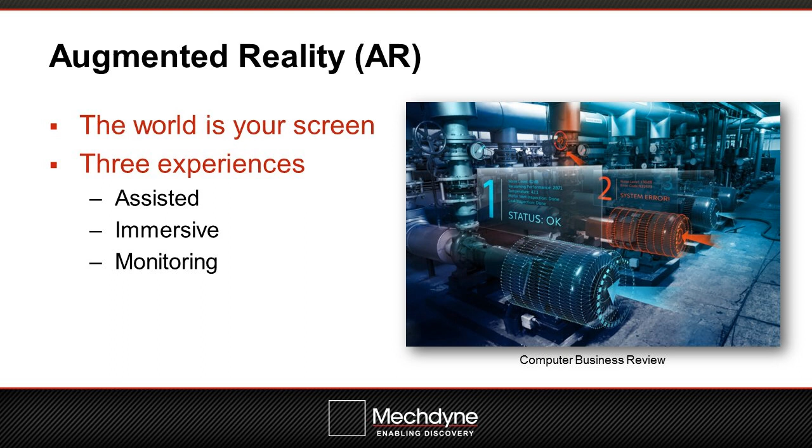Achieving that level of feeling like you're present comes from many factors. The display fidelity - the resolution of the displays, the number of screens you have, how photorealistic things are - are factors in making you believe the model is real. The interaction fidelity is how easily you can interact with that model like you would in the real world. Can you move around it easily? Can you pull things apart? Everything you do in the real world you want to be able to do in the virtual world. There can be other cues like audio cues or even smell cues, who knows what you're doing, but all these things can suspend disbelief and make you feel like you are present with that virtual object. So you're really trying to create a sensory experience to create a virtual world.

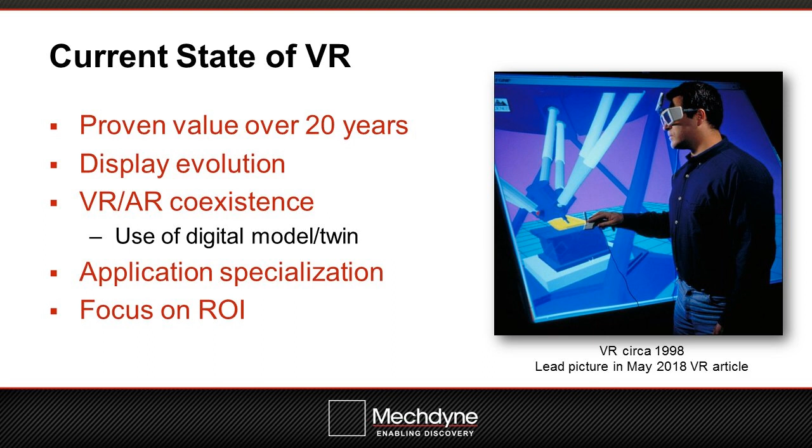There's always been a focus on, but I think it's been increasing especially in the last 5 years, the focus on return on investment. This is an investment, and we're being asked more and more how we can justify investment in these technologies, how it's going to save money or do other things. That's extremely important and increasing in importance, because quite often these technologies are competing with other initiatives in an organization.

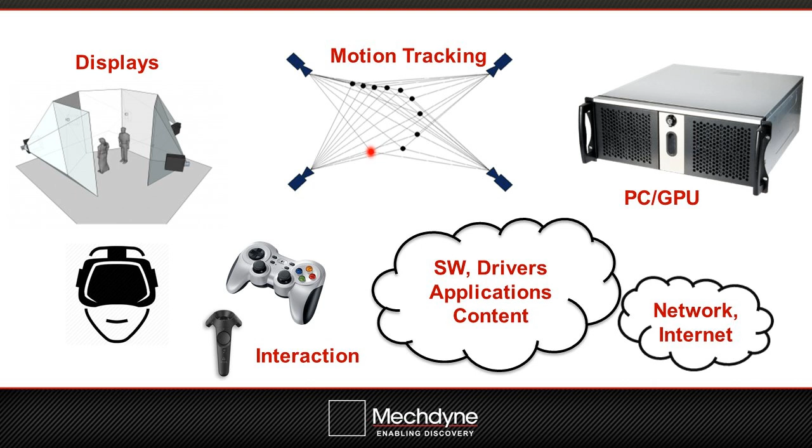The first part of this, I don't want to spend a lot of time here because each one of these could be a topic, and the types of displays are specific to different applications. But we were asked for a summary of the different display types available that go over and above head-mounted displays, so we'll spend some time on this.

But first, I should spend a little bit of time on head-mounted displays, because I think they are an important factor out there. They've been around for decades, but they're starting to meet expectations because of the increasing fidelity, just the way that people can view their data.

It's a low-cost device. It's a great way to start trying things and to test things. You can deploy them at the desktop level, it doesn't require its own space. Resolution's improving. They started out as single user, but there are now many multi-user applications where people can share in the virtual environment or share a virtual model, whether local or remote, and these devices continue to improve.

But there are some considerations that can sometimes cause people to start with an HMD and then start to wonder what other displays are available. That might be a factor of use time. People that have them often say they can wear them for maybe 15 or 20 minutes, and then it just becomes too fatiguing, for various reasons.

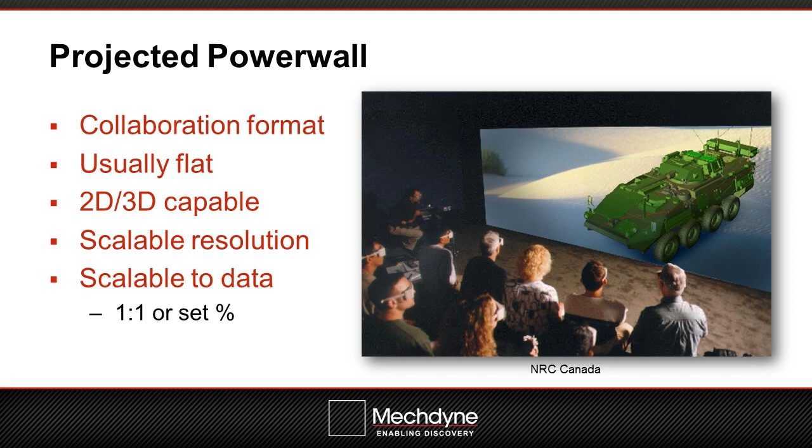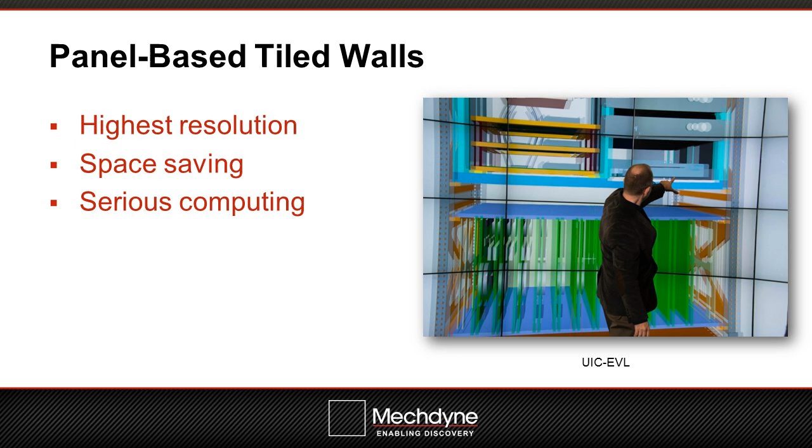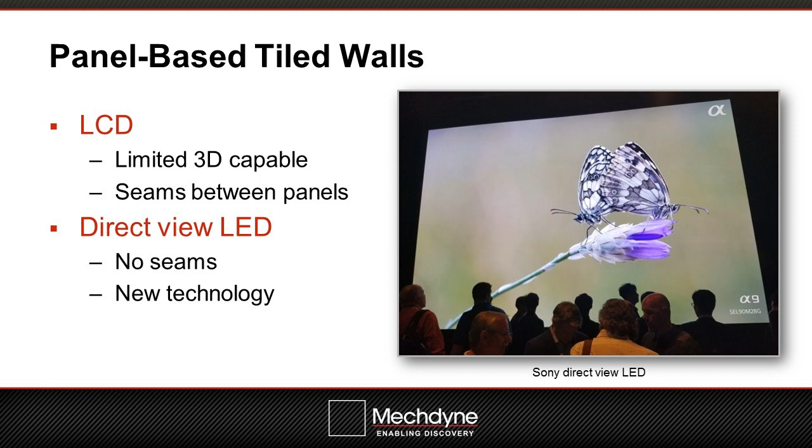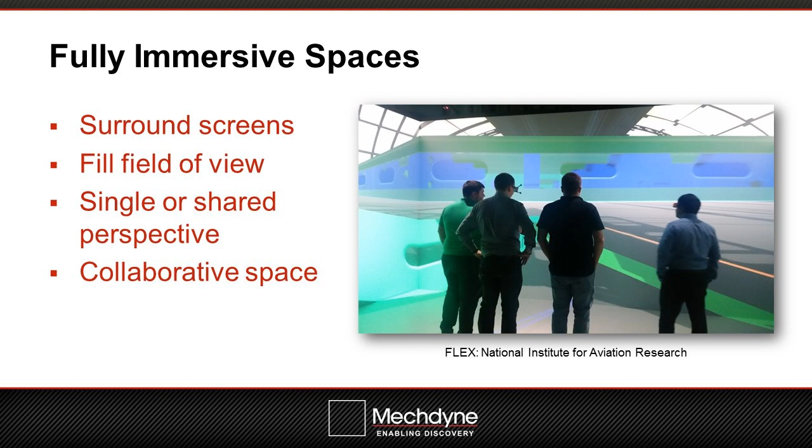Fully immersive spaces are just that - we're building an environment with surround screens. It could be a floor and a wall, or a floor and two walls, all the way up to six walls. The idea is to fill your field of view, display things in one-to-one scale, and give you that sense of presence. Key thing with these is they're highly collaborative spaces. That shared perspective has a lot of value, and we'll get into an example later.

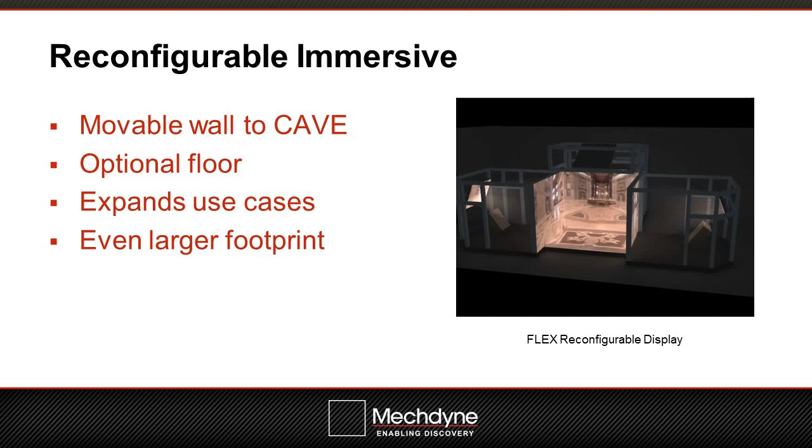You can extend this even further and make a reconfigurable space. You might think the previous image is limiting and may not cover all of your use cases, so you might consider a reconfigurable space. I have a brief video showing that a cave could be built so it extends out, stops, becomes an angled wall, and then goes out to a large wall. Think of aerospace as an example - in a cave configuration, you're inside the fuselage making decisions about seat placement and interior design. Push it out to a wall, and suddenly you're looking at the outside of the plane as a scale model, able to work that way. It extends the use, and higher utilization leads to better ROI.

These are the considerations - multiple applications do lead to better ROI. While these things are scalable, they may require resources. When you get up to a large environment, you're potentially looking at needing someone to look after that space. Computing increases, and you might have to make facility modifications, so it becomes a higher investment. But again, you want to look at the return on investment, because that is the key thing to consider.

The final part of displays - and we've been asked more and more about this - is can displays be made portable? Absolutely. When you go to a trade show you see a lot of HMDs, but virtually every type of display you've seen can be made portable or transportable. You may have different reasons for taking it out into the field, but there are many portable options available.

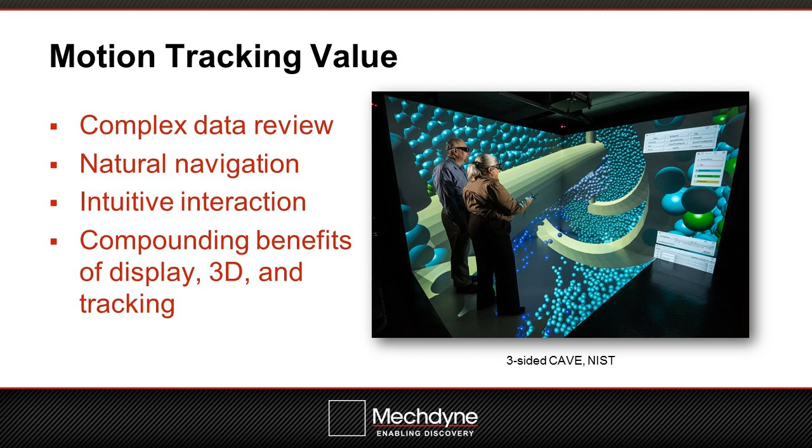And really there's a compounding benefit to all of this, because a large-scale display where you could look at something in one-to-one scale, and then you're adding 3D stereoscopy to that so you can see the spatial relationships, and then you add motion tracking so you can move around things. It is a compounding benefit. So you say, okay, what are the benefits?

There's a few studies done on this, and I pulled out one where it was a review of spatially complex data. People were asked to look at the data, find specific targets, and it was tracked how long did it take to find specific objects, how accurate were they in finding them, and found that when someone had motion tracking on, head tracking on, that they were able to find things faster. It's called time to insight, so time to that aha moment.

If you can get there 50% faster, think of what that could do. If you can shorten your insight time, move things along more quickly, and if you can do it more accurately as well, that just, again, there's potential value there to be tapped. And again, while this is fairly standard in a cave, it is optional to others, but it's something to ask about, how could this help me interpret my data more quickly?

So we're going to move on into another important topic, which is the software aspect of this. And the question that we always get is, okay, I have my CAD models, but how do I get those into VR?

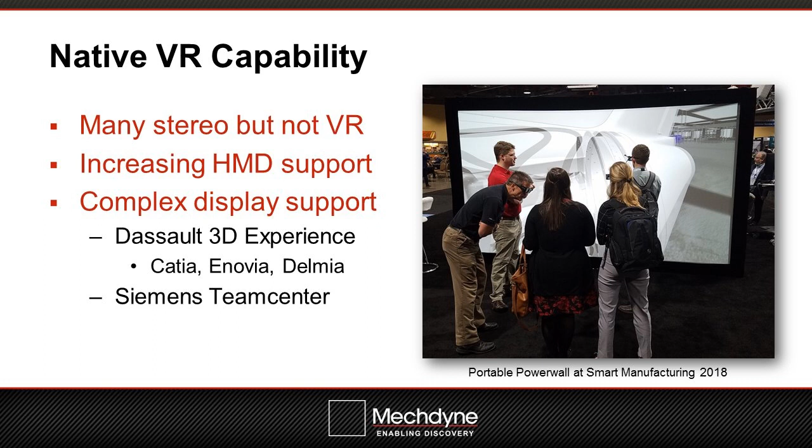So if your software doesn't have any VR features, there is something you can do called CAD to VR Interception. There are plugins available on the market that you load along with your CAD program. You run your native CAD application, and the software plugin will add 3D stereo if it's not already there, and it will add motion tracking capabilities for an HMD, going direct from your desktop into the HMD.

Keep in mind that many of them are only viewers. All you can do is look at the geometry of your model, and that's essentially what a VR interceptor is doing - intercepting the geometry, and then you are looking at a representation. You're not looking at your actual data, you're looking at a representation of your data in the VR space. Some of them will allow you to fly around and navigate, and that's about all you can do. Some plugins offer additional functionality where you might be able to do measurements, or identify specific meshes and components, and start pulling pieces apart.

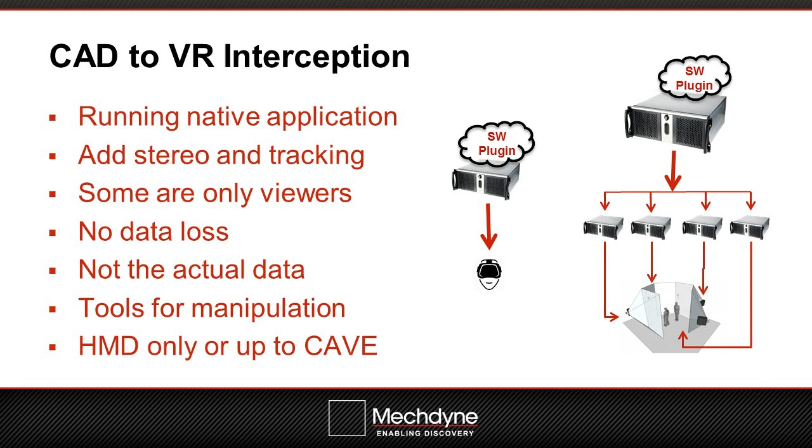So if you're investigating these VR interceptors, search for them and you'll find them. That's what you might be looking for - those additional tools, and there may be even collaboration features or multi-user capabilities available. Some of these interceptors will go all the way up to caves. The illustration on the right basically shows you have your main workstation, and it separates the geometry or representation of your model into the required number of outputs for whatever display you have. As an example, a cave with 3 walls and a floor would need 4 outputs. So the plugin does that interception and division into those appropriate screens and viewpoints, and manages everything from there.

Now, game engines are just that - these are the game engines that were developed for creating consumer games, but many of them are really starting to focus on the enterprise environment because there's so much potential. With game engines, you could start from scratch - you could build your model, your car, your machine, using a game engine and building it up from scratch, but we're not going to deal with that.

We're really talking about the conversion process. It is a process: you start with your CAD model, and then the game engine or plugin is going to look for things like the common colors, your object hierarchies and data hierarchies, and metadata. It's going to look for common meshes, and things like that would allow you to eventually pull apart things like the wheels or common elements so that you can interact with your model.

Why game engines are coming on strong is because it's extending the use of the CAD model into other applications by adding things like photorealism, to make an object or your CAD model look much more real. That might be very valuable for marketing or sales purposes. If you were doing high-level demonstrations and wanted something to look like it was in a realistic environment, outdoors or indoors, you can add those components in. Real-time ray tracing is coming on so quickly, where you get the shadows, you get reflections, and it just adds that sense of realism to a product.

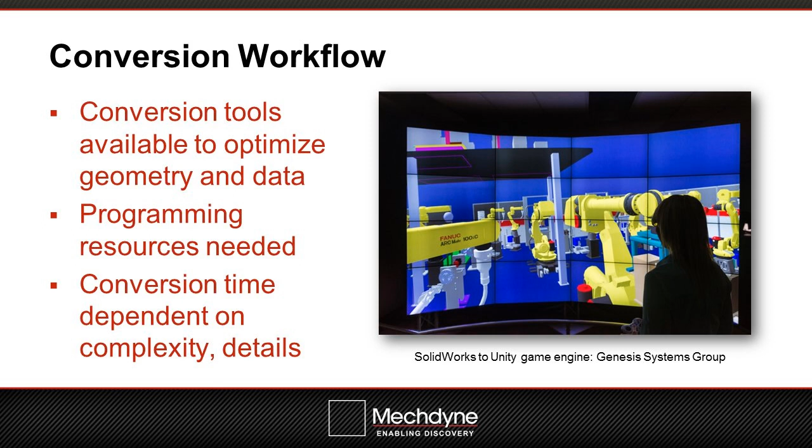The goal is to make this as transparent as possible, so you're essentially going direct from your CAD program into the Unreal Engine, where all that real-time rendering is done, physics are added, and you can get into photorealism. Their goal is to really have proper conversion without any losses. That's a real focus, so what you have in your CAD model translates into that game engine and you have confidence that it is accurate.

There's even work being done to try and make some of that bidirectional. I should have said before that with some of these VR interceptors, it is not a bidirectional workflow. You can't, with a VR interceptor or currently with these game engines, work on your model and have that translate back into your original CAD model or program. You gain insight by looking at your model in one of these viewers, then go back to your desktop, make changes, and view it again. Your iterations get faster and faster, but it is not a bidirectional workflow.

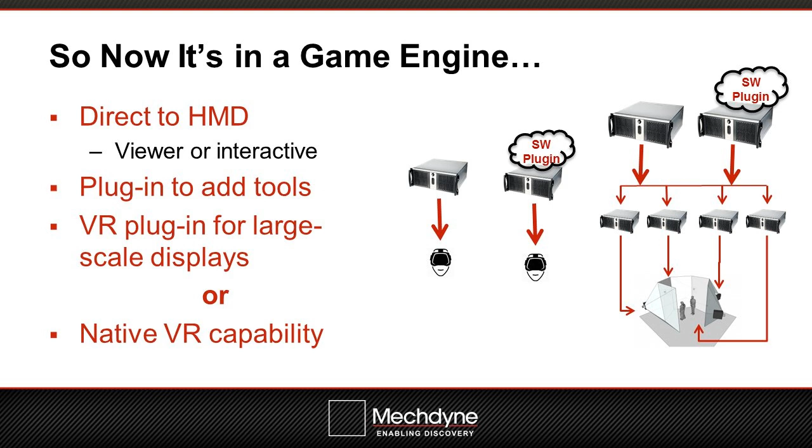Last part about software, and it's not really about the VR part, but once you have something in VR, I mentioned being able to do collaboration before. With these environments, there's a lot of local collaboration you can do with your teams, but we also get asked about remote collaboration. Absolutely, there's people who want to connect from one office to another, one city to another, one city to another country, and yes, that's absolutely possible.

When you think beyond local and more about going remote, you need to look at network connectivity. The biggest thing to avoid is lag time—if someone in Detroit points at something, that pointer shouldn't show up five minutes later in Europe. There are many factors affecting latency and bandwidth requirements, and that's where you need a subject matter expert to look at the types of displays.

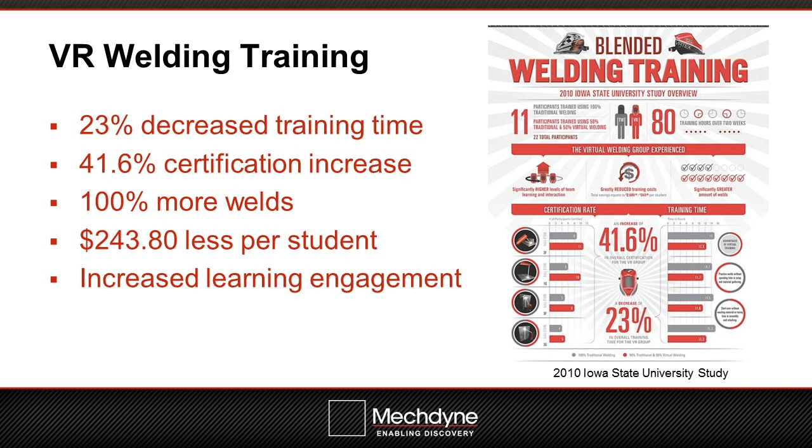This one also happened to be done at Iowa State University - I didn't realize that until after I'd read both; they were done at different times. This was a session done in a cave where they invited a company that built hydraulics that never had experience with virtual reality. These people had about 7 years of CAD knowledge, CAD experience, but had no experience with caves or VR of any kind. So they wanted to know what it would be like to work with their models in a VR space.

They did 3 sessions in a cave. In the first one, it was really about seeing their models at 1-to-1 scale for the first time, but also seeing it in 3D so they could see the spatial relationships between very densely packed components. While not quantitative, they had to admit that they were able to achieve insight much, much faster. As I said before, time to insight was reduced, and that had value to them.

So then about a month later, they go back in and say, okay, we have our model settled, but let's look at the assembly process. What's it going to be like to actually build this? Will people have the access they need to do this efficiently? What's the procedure going to be like? In that 90-minute session, they were able to work through many more iterations and make changes to how the components might fit, or access points and the procedure of assembling it.

And then in the final one: okay, we've decided what this is, but what is the work cell going to look like where we actually build this, and what's the entire assembly line going to look like, and the factory going to look like?

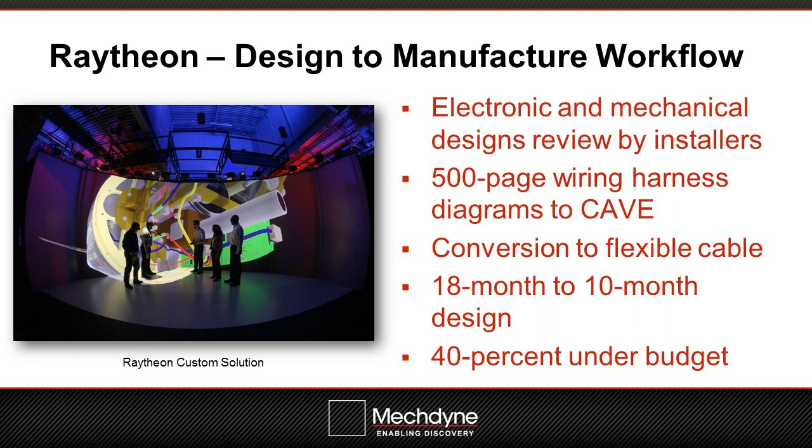I talked before about having multiple applications in the same display to increase utilization, and they used the same system for facility design. In this instance, they were building a new factory, brought in the model of the factory, and found, quote, hundreds of issues—ranging from needing better signage, to a door being in the middle of the floor with no clear purpose. They went through 57 design iterations before construction.

They acted upon 49 major issues found, and calculated that they avoided $1.5 million in construction changes. So if they had started construction without finding these in advance, it would have cost $1.5 million more to make those changes later on. Cost avoidance is another way to measure ROI.

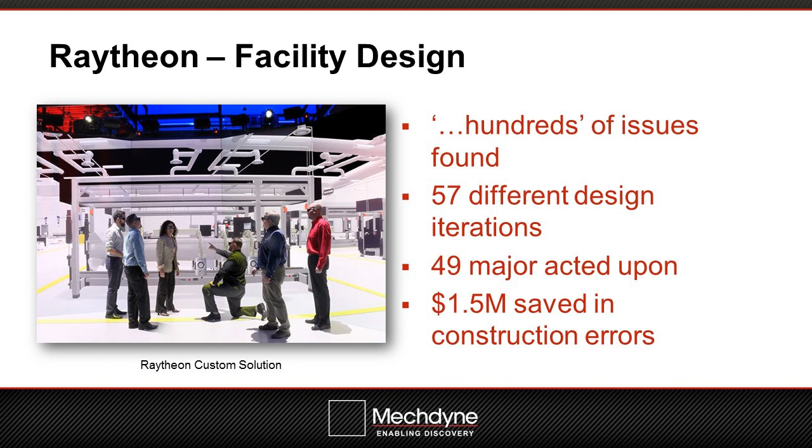So we're nearing the end of our time to be able to get into our Q&A session.

To end off the ROI section of this, ROI is very personal to every organization. I wanted to put in some thought starters on what it may mean to you—okay, that worked for that hydraulic company or for Raytheon, but here's what I'm dealing with. So think about: what is the cost of a physical prototype for you if you build them? We talk with people doing work cells with cardboard and plywood, and there's time to do that, and then time to change over to the next prototype. Then, what does it cost if you didn't do any prototyping, any virtual prototyping, and you realize an error later on?

What does it cost to fix that design error once you've gone into manufacturing? What is the value of reducing time? What is the value of avoiding cost? What is the value of your user's time? What is the value of an engineer per hour? And if you could save their time, what else could they be working on?

The last one is looking at it potentially from a sales aspect. If you were to extend the use of your virtual models and show them to clients, use them for marketing purposes—what's the value of a new client making a new sale? An example we used in the last webinar was Genesis Systems, who uses their system for design but also for sales, and will adamantly say they realized tens of millions of dollars in sales as a result of being able to show their data differently in a VR space.